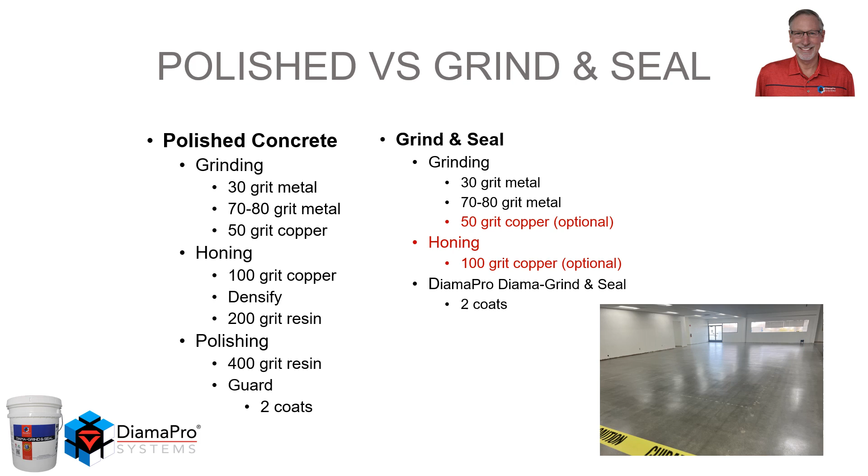So comparatively, one has many more steps than the other. Is the durability the same? No, they're not. But many times, the customer only wants a grind and seal system.

So what is Diama-Grind Grind and Seal? It's a material that's formulated to be used in a grind and seal application. It's an acrylic, waterborne, high solid sealer. It reduces dusting, easy to clean. It slightly darkens the surface, but it retains that natural appearance of a ground concrete surface. The final appearance will have a higher gloss than just the ground surface itself.

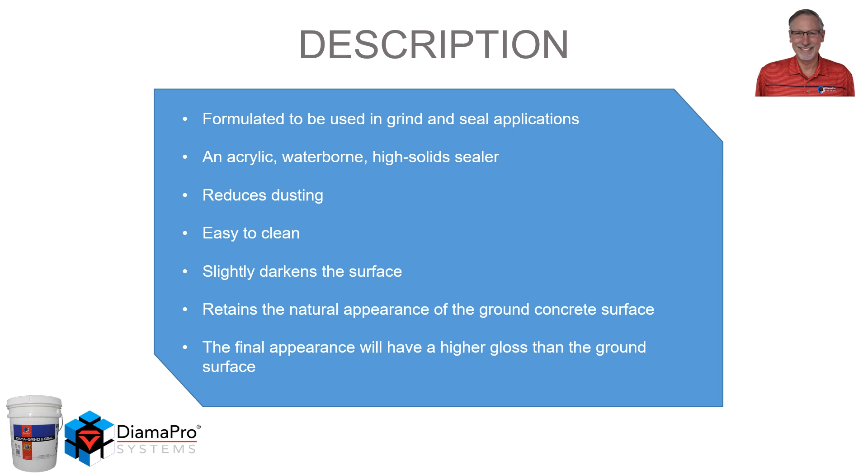So when do you recommend this system? When a customer is looking for a sealer to be used on the ground floor. They have a slab that's ground, but needs more protection. They just don't want to leave it open. They'd like a gloss, but only want to grind the floor. They don't want to do a full polish. They were looking for a low-cost system.

With this system, you only have 1 to 3 grinding steps, 2 coats of application of the material. In 4 to 6 hours, you can use light to medium use, and in 12 hours, full use.

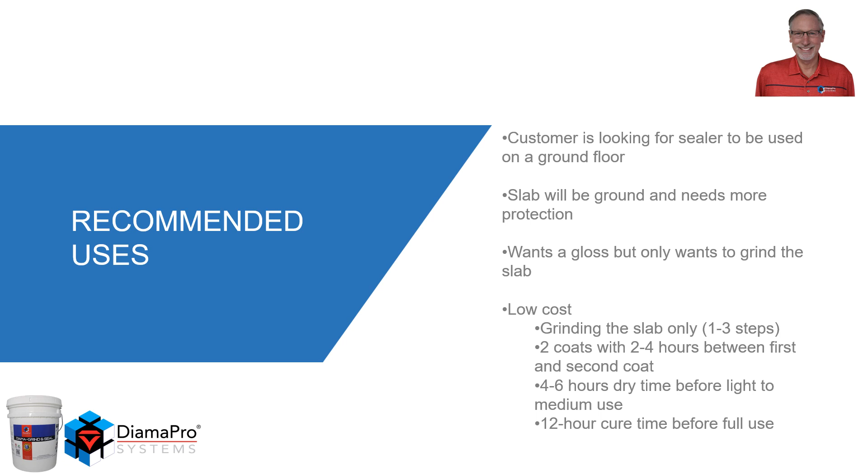When it comes to the VOC regulatory compliance, many parts of the country have different regulatory requirements. Maricopa County, Phoenix, and also Southern California are the most stringent. This material does meet the intent of all regulatory VOC agencies for acceptance as a sealer for concrete.

Let's look at the chemistry. It contains acrylic, which is a powder, water, and also co-solvent. The co-solvent liquefies the acrylic powder. Then water is added to create a flowable material. Once the material is applied to the floor, the water evaporates. You'll see this in a white appearance, and this white appearance, once the water's gone, will go away. The co-solvent then evaporates, leaving a clear film behind.

All materials have limitations. Let's look at the cure time. If you apply your second coat before the first coat has had a chance to release all the water and solvent, you could cause alligator cracking in the second coat or retain some of that white appearance that we saw during the application. Temperatures, air and surface temperature during application need to be between 50 and 90 degrees.

During transportation and storage, the material will freeze, so you have to be cognizant of that. Prior to use, you always want to precondition your material above 60 degrees so it will have good flow characteristics. Also, if you're in a cooler temperature, such as that 50 degrees, it will slow down the evaporation of the water and solvent, so you have to be aware of that.

Once it's applied, you want to stay away from ponding water. The material is breathable, so it allows moisture from the concrete to come up, but also it allows moisture from above to go in. So if ponding water is there for a long extended time, it could be absorbed into the film and cause a white hazing.

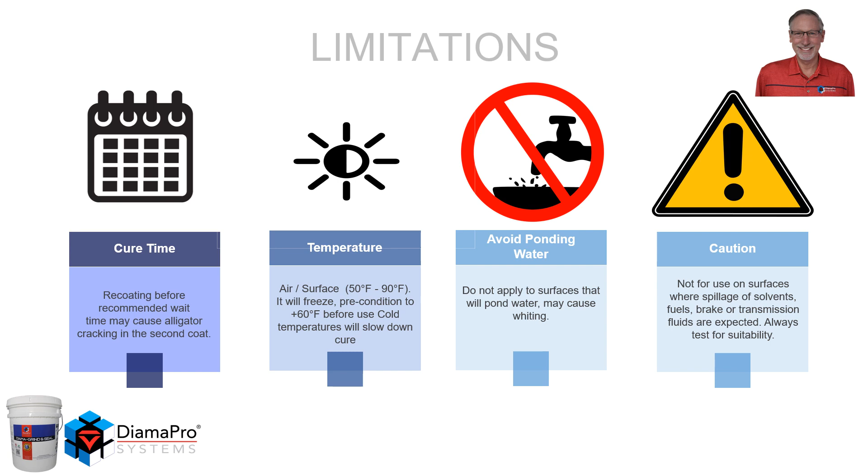And when it comes to protection from solvents such as brake fluid, gasoline, transmission fluids, this is not the system to utilize for that type of protection. But during your mock-up phase, you can always test different chemicals to see how they will react.

The coverage rate of the material is dictated by the level of surface prep performed. If you stop at a 70 grit metal, you're going to obtain approximately 400 square feet per gallon for your first coat. If you bring it up to 100 grit copper, that's going to increase to about 600 square feet per gallon for your first coat. Second coat, somewhere between that 400 and 600 square feet for that second coat.

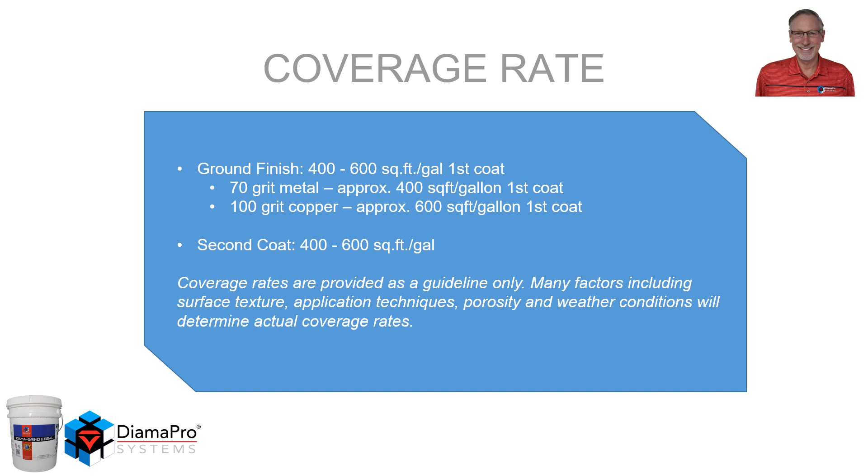Coverage rates are always provided as guidelines. These guidelines have been tested and proven. It's just that there are other factors, such as the porosity of the concrete, which could absorb more of that first coat to build that initial film so that the second coat can fill in and create a uniform film.

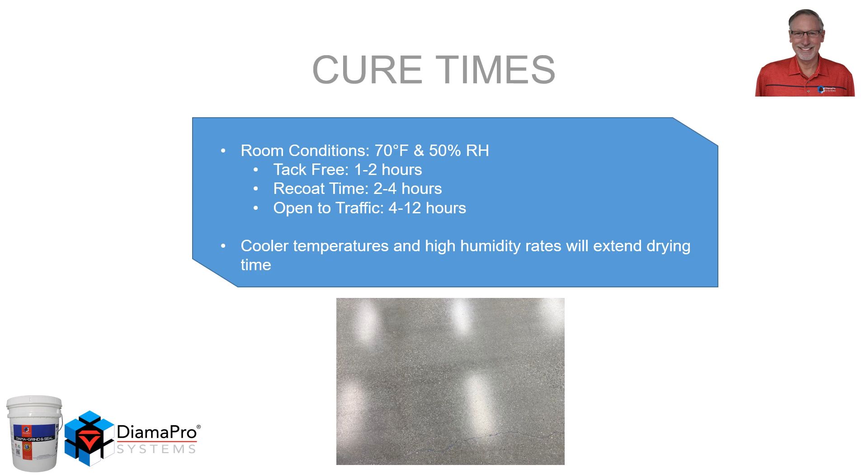All cure times are based on lab conditions, which are 70 degrees Fahrenheit at 50% relative humidity. So if you have anything other than that, such as a lower temperature or higher humidity, it will extend these tack-free times and recoat times. So tack-free, 1 to 2 hours. Recoat time, 2 to 4 hours. Open to light traffic, 4 to 6 hours. And heavy traffic or normal use, 12 hours. The colder the temperature, the more this will be extended.

In the application steps, this material is ready to use. Do not dilute. We recommend a mock-up to be installed on larger projects to determine coverage rates, tooling, and also the final results. The surface must be clean, dry, and free of all contaminants. If there is a curing compound or any sealer on there, that should be removed during the grinding phase. You do not have to grind any higher than 100 grit copper, but again, you can stop much earlier than that to reduce your cost.

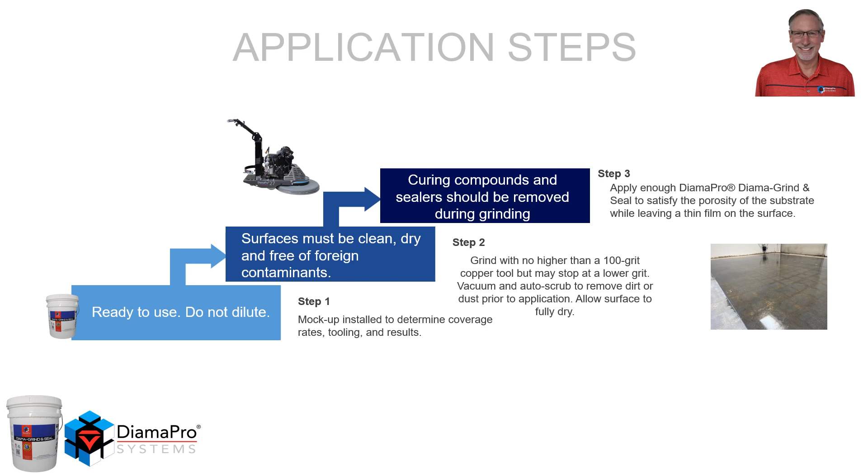Also, once it's ground, vacuum and auto scrub to remove all dirt and dust prior to the application, and always, if you're using an auto scrubber, allow the surface to fully dry. Apply enough material to satisfy the porosity of the substrate while leaving a thin film on the surface. If you're using a microfiber mop and your mop starts to flip, apply more material so that you have some lubrication for that microfiber to slide across the floor.

You want to apply the material with an 18 to 24 inch microfiber pad and a low pressure pump sprayer. A Padco applicator or 1/4 inch microfiber roller cover may also be used. In small areas, a cigar roller or brush work well.

Spray apply in a uniform manner in front of the microfiber mop, taking care to minimize all lap marks. Do not over apply. But if your microfiber has a tendency to flip while dragging it across the floor, apply additional material to create more of a flow for that microfiber. Always spray wet into wet to produce a uniform film and use natural breaks such as concrete control joints as starting and stopping points.

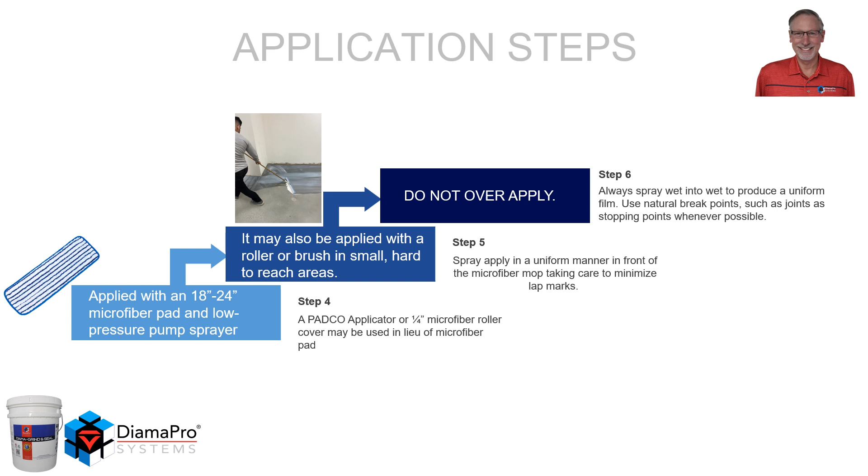Here's an installer utilizing a Padco applicator. Instead of using a low pressure pump sprayer, they're just applying the material to the floor in puddles and dragging it across the floor. Notice when they're applying the material, it looks streaked. This streaking will go away once the water and solvent evaporate out of the material.

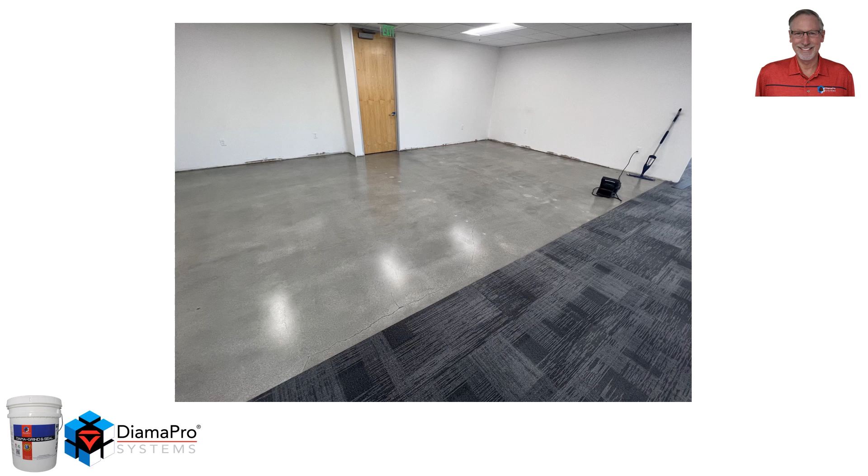If your final film contains that white haze to it, that means the material is applied too heavily or the temperatures are too cool and the humidity is too high. Here's the cured system. The white haze is gone and no streaking is visible. The concrete is slightly darker than original, but yet you retain the natural appearance of the ground slab itself.

The grind and seal will fill in some cracking, but if all cracks need to be filled, utilize Diama-Pro Diama-Grout prior to your last diamond cut to fill in any type of imperfections that need to be filled.

During the maintenance of the system, all spills should be removed as soon as possible. If you're seeing additional wear or abnormal wear in certain areas, or where something has spilled and removed the sealer, once it's cleaned extremely well, an additional coat may be applied. To retain the original gloss, it may be burnished, but it's not necessary.